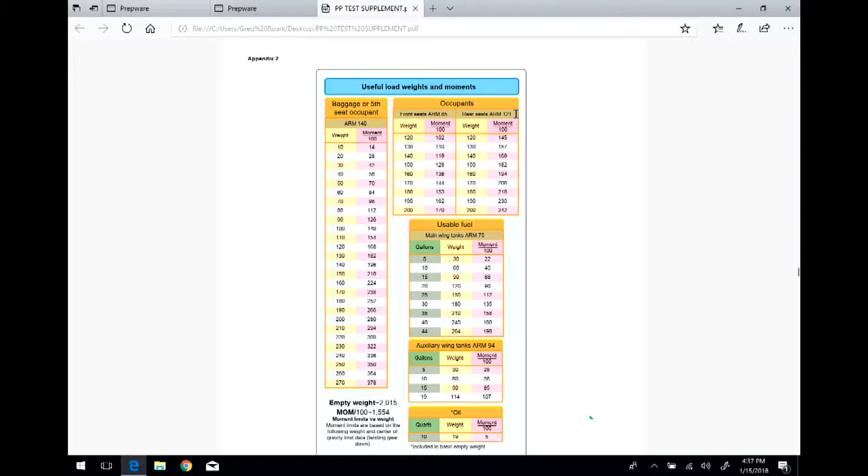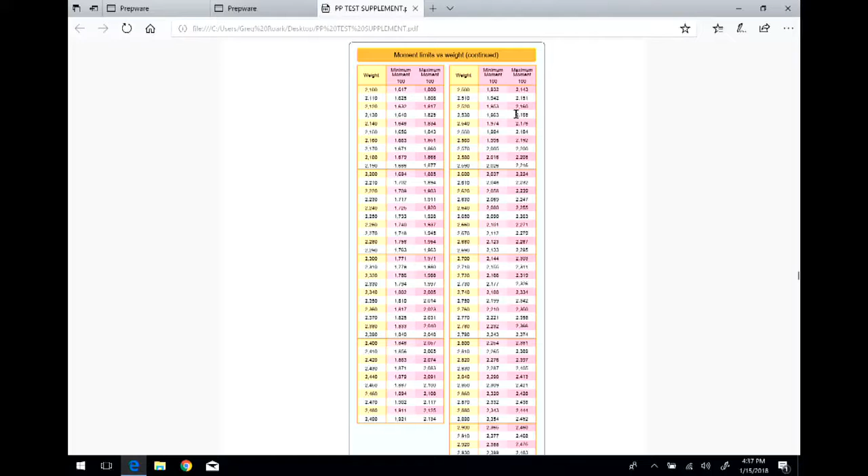Okay, so when we look here, what is our weight? Look here, guys. 2,901. All right, so we see where we are here.

See where we are here? All right, and what did we say our moment is? 2391, right? Is that within this range? Yes, that is correct. By the way, what is the CG?

82.43 is correct. Gavin, tell us how you got that. Total moment divided by total weight. What do we have to factor into the total moment? We have to multiply that moment times 100 by whatever the index is, because you want that whole big long hairy number divided by the weight.

That gives you then where your arm is, or CG. Yes, sir. So let's say you figure out that the weight is overweight by like 20 pounds or something. So then if you go onto this chart and it's 2,000...

Are you asking me that question because it shows up on another problem here that we're going to cover momentarily? Yes. Well, let's get to that one, shall we? Everybody good on this one? Okay, everybody good.

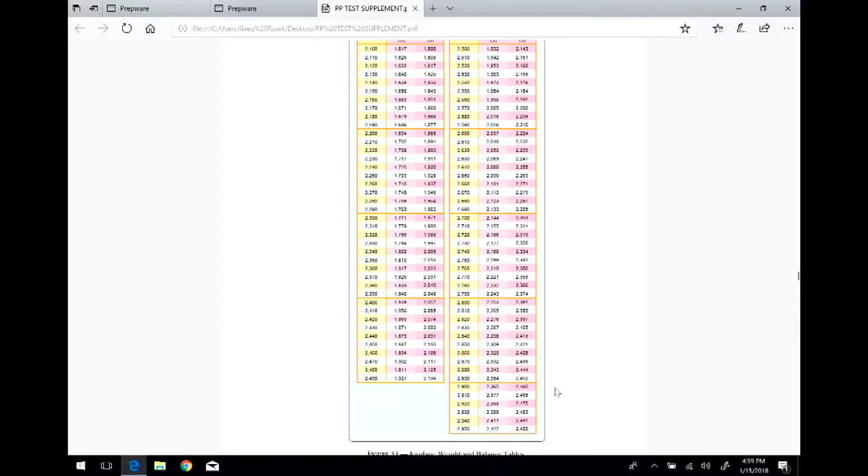Now, basics, basics, basics. Weight times arm equals moment. Another way to express that algebraic equation is total moment divided by total weight equals arm, or CG. That's how that works. So when you're asked to determine the effect of the CG, this is where you get it, right? Weight times arm equals moment.

This is what we did in class. It's no different. The only difference is you didn't have a book telling you what the answer was. You had to do it yourself. How many of you got this? How many of you got this correct? Okay. All right. Is everybody, are we good here?

Let's go to problem number 3. Problem number 3 here, refer to figure 32 and 33. Determine the airplane weight and balance. Determine the weight and balance condition of this aeroplane.

Now, I'm not going to put this one up here. So let's look at this. Again, we know on this, because it's figure 32 and 33, what is the empty weight of this aircraft? 2015. You've got that in your column, right? What do you have for the moment?

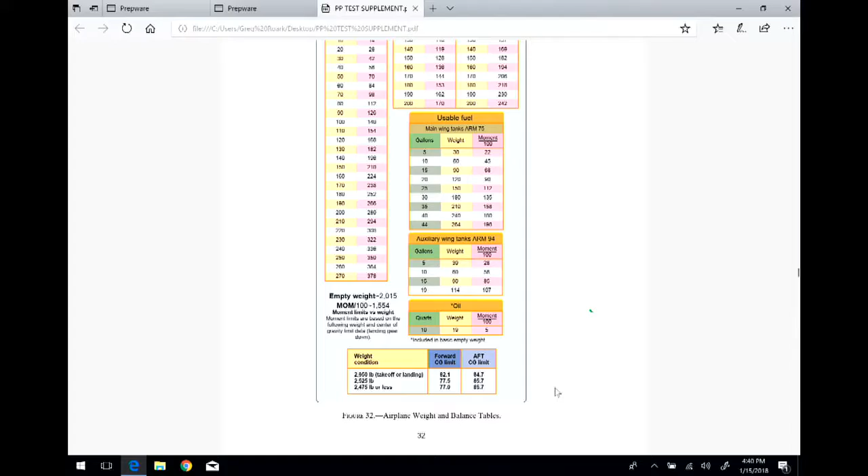1,554, because that's what it shows here on this sheet. So that's what you put on here, right? I can do this. Okay? Now, front seat is what? 280. 280 times 85. Okay?

Rear seat, 325. Fuel in the mains, 35 gallons, 210. Oops, you've got auxiliary fuel on here as well, 18 gallons, 108. Baggage. All right, what is the arm for the front seat?

85. Arm for the rear seats? Fuel, auxiliary, and baggage? All right, now let's take a look here at our moment.

We know that the moment of the empty weight of the aircraft is 1,554 because the darn thing tells us that. So what is the moment for the front? 238. What is the moment for the rear? 393.25, right? Okay?

Where did you know the 393? What was that? What is it? Sorry, I 325 times 121 is 393.25. Hold on, we're not there yet.

Okay, now, fuel on the mains. 210 times 75 is 157.5. Fuel for the aux, 18 gallons weighs 108. 108 times 94 equals? Okay, 101.52.

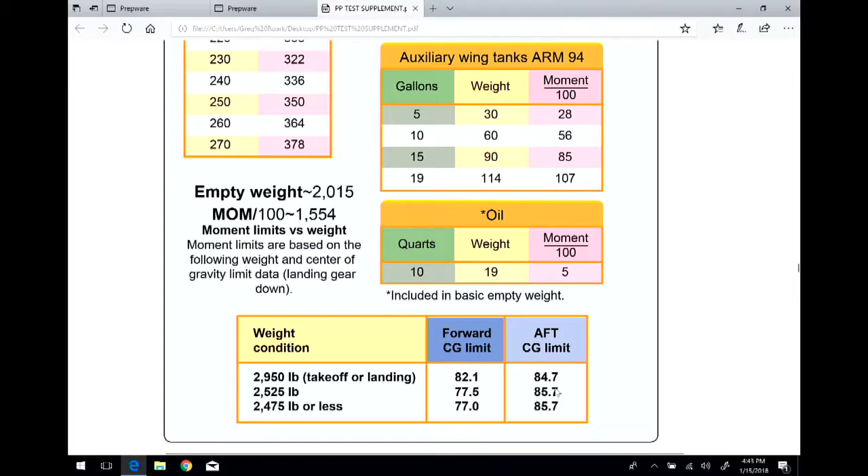What does that tell us? Overweight by what? 30 pounds. Max weight on this aircraft is 2950. Says right there under weight condition. Okay? So we're 30 pounds over.

Now let's take a look at our moment. Where's our moment? Let's take a look here. If we know that we're right down here, and we say at 2950, the max moment on this should be 2,499, right? See this?

So with this, it shows that if we look at that weight range of 2950, that we're over. However, let's think about this: would the CG be out of range for an aircraft 30 pounds overweight? How would we know that? We have to figure what?

The CG. What's our CG for this problem? 83.99. Look up here. Well, come on, look up here. Yeah, I got the CG was in range because of that. So if you look here, the actual CG is kind of within range even though you're 30 pounds overweight.

Now, what was the second question? Second part of this question. Would you fly it? I said no, but the CG is in range, I said no, the weight and the moment are out, but the CG is within. Okay, no, with an exclamation point. Okay.

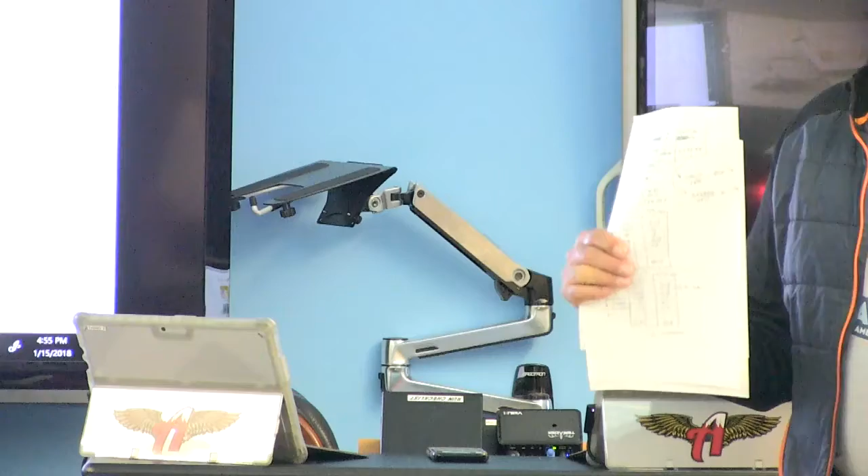Do you guys understand how I did this? Now, another way you can do it — if you don't understand how to do the actual net replacement of your moment — is to do two tables. Here's what it is when it landed, here's what it is when I take off. What's the difference?

After all of that, did you get your CG went from 84 inches to 81 inches? 81.01, that is correct. So what happens is your CG moves forward how many inches? I said 3 inches. That's exactly what happens.

Okay? Guys, how we doing? Okay? Yes.

These aren't — these I made up. It's just going to be the ones in the book. That's what they're going to be. But guys, here's the deal.

You can't memorize them. I mean, you're going to memorize them for the test tomorrow, but you've got to know how to solve the problems. Do you know why? Because when you're out there taking your check ride, your DPE is going to make sure that you know how to do it. And I am darn sure going to make sure that you know how to do it in the oral test prep thing, because we're talking about your life here. So you're going to know how to do these.

This would be a good time to learn. You with me? Let's do the next one. Real quick, the next one's not going to take too long.

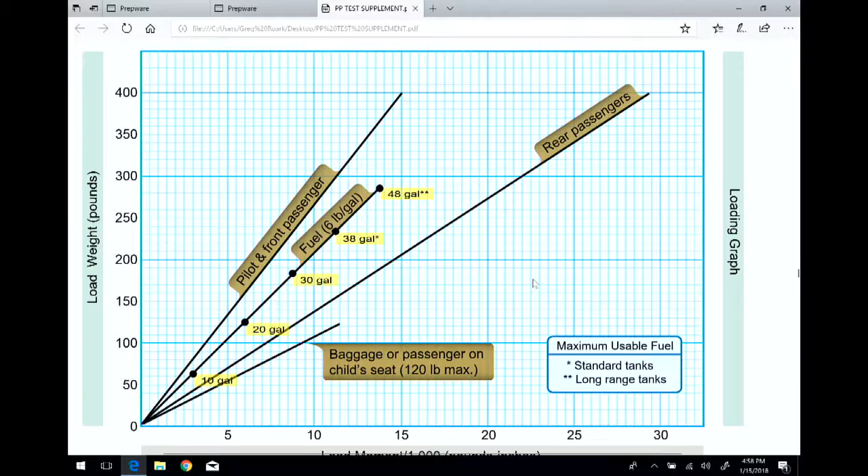1350, what's the moment? 51.5. What is your moment index on this particular figure? Divided by 1,000. Don't get confused, it's divided by 1,000, okay?

Front seat, what do we got? 375. Rear, what do we got? Fuel, what do we got? 216. How do we get that? That is correct, 36 times 6. Oil, what do we got? How many? 15 pounds. 15 pounds of oil. Remember, we got to account for the oil, right?

Okay, all right. Now it gives us the moment of the airplane, 51.5. It gives us the moment of 8 quarts of oil, right? So we have to calculate what? We have to calculate the moment for everything else. And how do we do it? You draw your lines. This is where we draw lines. This, my children, is where I draw the line.

All right, so now on the front seat, 375. Let's take a look. Here's 350, 360, 370, 380, 390 - I didn't put those on there very well. 375 is going to be where? Okay, 375 is going to be between this and this. It's going to be about right there, right?

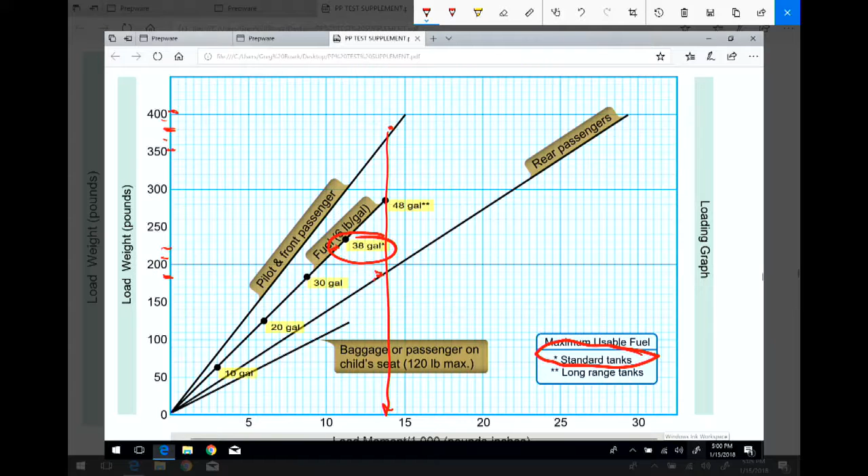99.8. What is the CG? For your figure, that would be correct. What'd you get? How'd you get it? Total moment divided by, okay, all right. For mine, I got 43.906731.

Last one, number 7. What is the maximum amount of fuel that may be aboard the airplane on takeoff if loaded as follows? What did you get? Story, say what you just said. How much is that? 48 gallons. How much does that weigh? 288 pounds.

Here's why this is a little bit of a trick question, and why I have the two asterisks below - did anybody catch why? Drawing attention to the fact that on this particular aircraft an option was the long-range tanks, and the long-range tanks give you 48 gallons. Now, how many of you actually did the math to see, does that actually work? Did it? Yes, it does. It actually does work. So when you do that - that was the one I was kind of guessing on - your weight, because the max you can put on there is 288 pounds with the long-range tanks, that's it, 48 gallons.

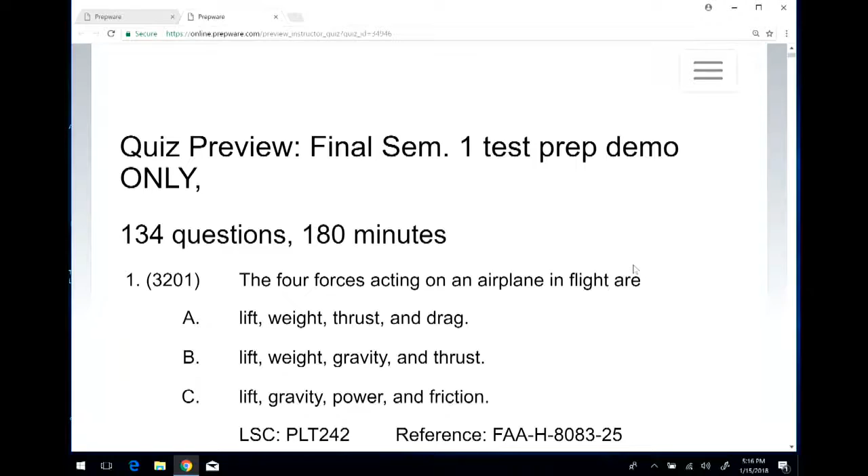Wait, are the questions going to be in the same order? Drag, A, alpha. Alpha A, lift, weight, thrust, drag. Never mind, I figured out the answer, but I was wondering if the questions are in the same order for everybody. Yes, it's going to be alpha. That is correct: lift, weight, thrust, drag.

Click on it, make it go green. It doesn't go green because isn't it a practice quiz? I'm just previewing it here, guys. This is what we're doing.

Oh, alpha. Oh wait, alpha again. Yeah, alpha, I just did that question. There we go. Now, my God in heaven. This is so... oh, there's napkins, yeah. Okay, random. Now here's the thing.

This is an example of the most correct answer. Is it the correct answer? Why would it be false? Because wouldn't they technically be in equilibrium when you're on the ground and not moving? No, because there's no work. During straight and level, unaccelerated flight, that is the correct answer. What you're choosing is the most correct answer.

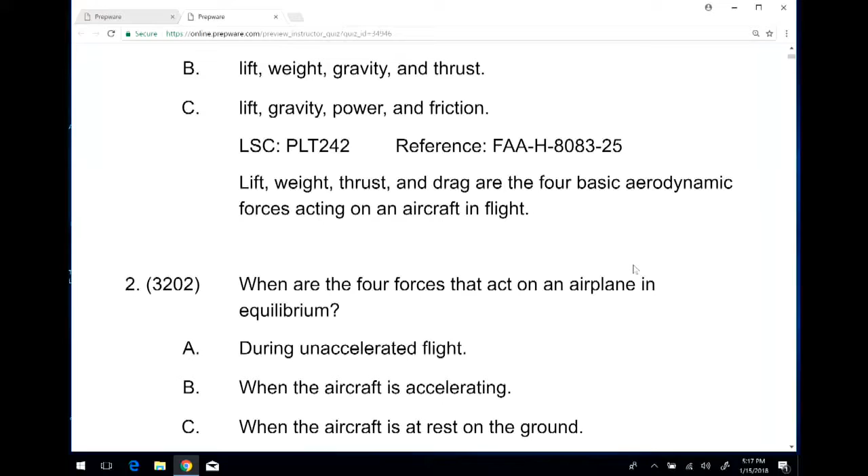What does the FAA tell you to do? Choose the most correct answer. Okay, so in this case, it is the least suckful of the ones that you have. Okay? So there we go. All right, next.

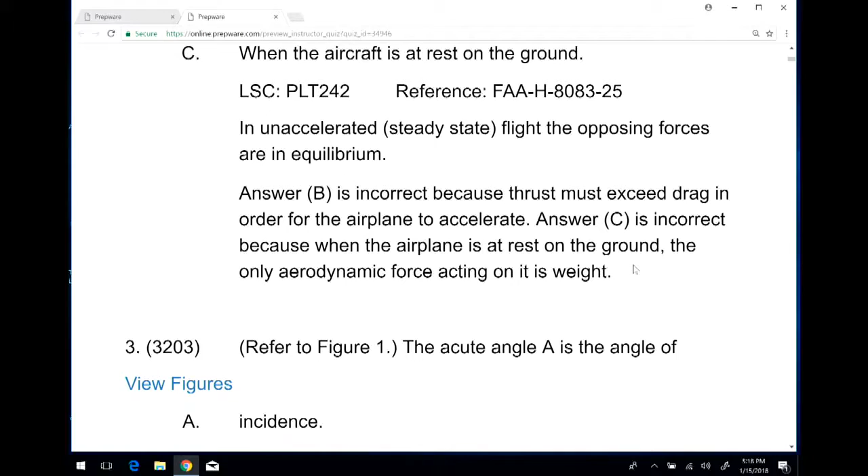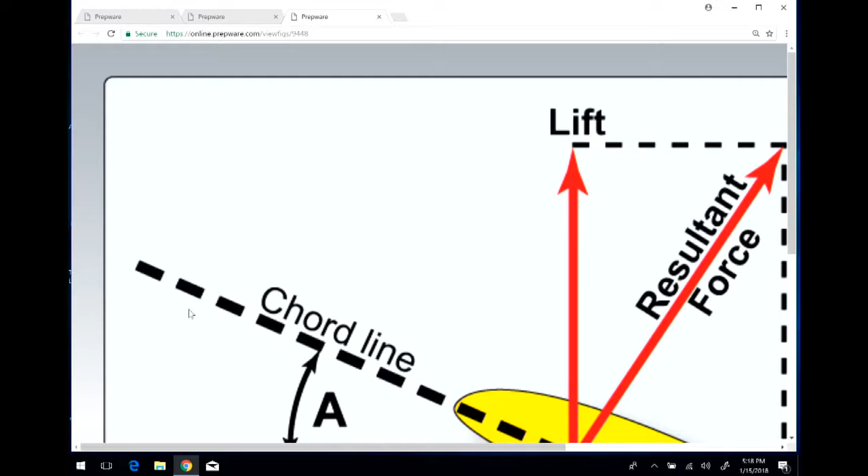Refer to figure 1. Banana. I can see this figure in my head right now. Alpha, are you kidding me? Wait, I didn't even see this. It's the angle of attack. Angle A, yes, angle alpha. Acute angle A is the angle of attack.

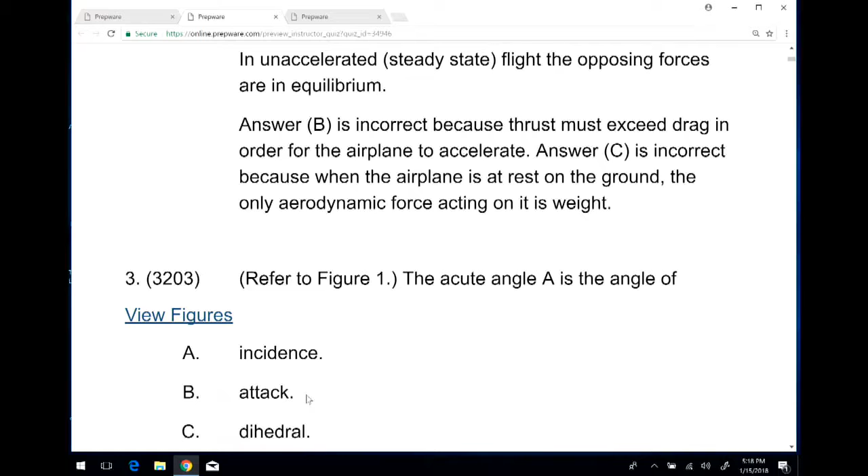So the correct answer is Bravo. Wait, I have a question about this. It doesn't really pertain to this in any way, but it could be answered very quickly. Okay, go ahead. Do all pilots use the same alpha, bravo, same letters? Because once I was flying commercially and the people...

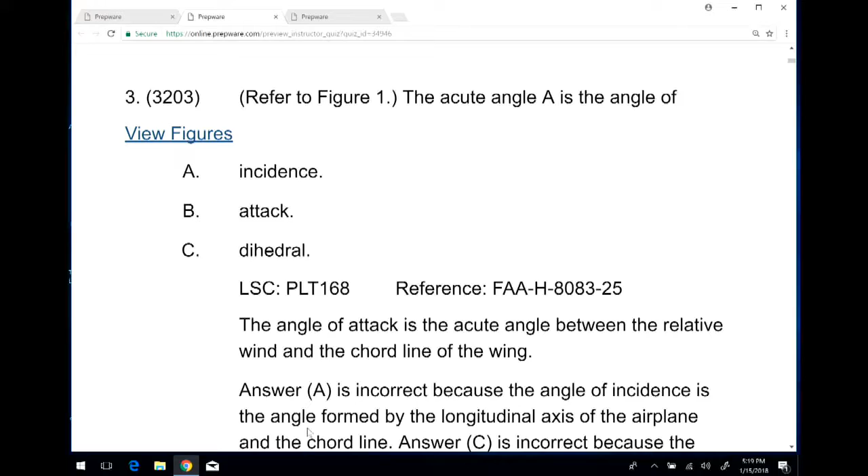It's pilot talk. Okay, all right, here we go. When we get to communications, you'll learn not just the Z, Zulu - you'll learn the pilot phonetic alphabet, and you'll also learn how we say certain numbers when we get to communications.

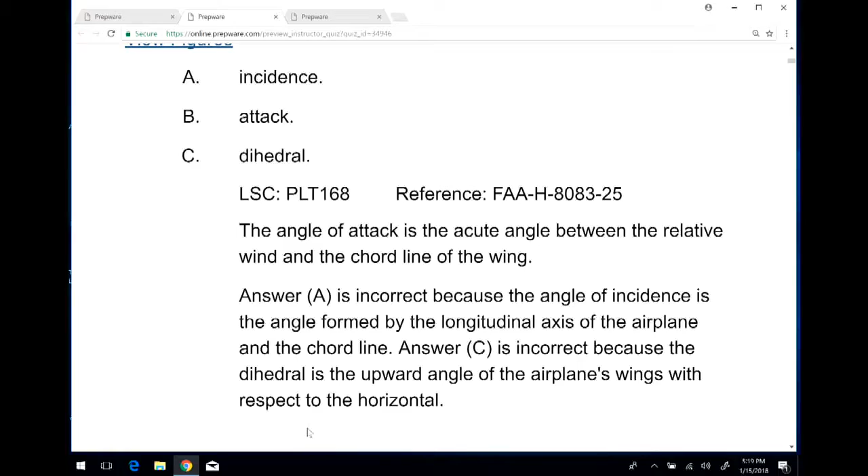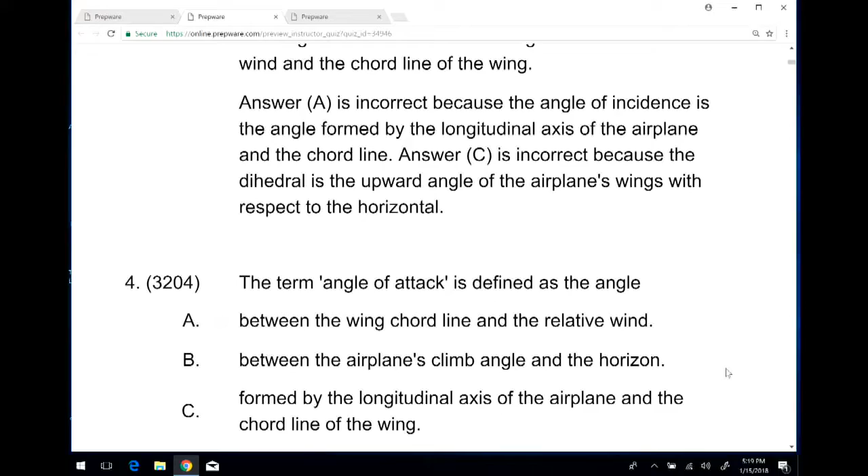All right, here we go. Alpha. Yep, alpha, not omega, just alpha. Gentlemen in the back, this is for you. What say you? You like it? I do too. Okay, that's alpha.

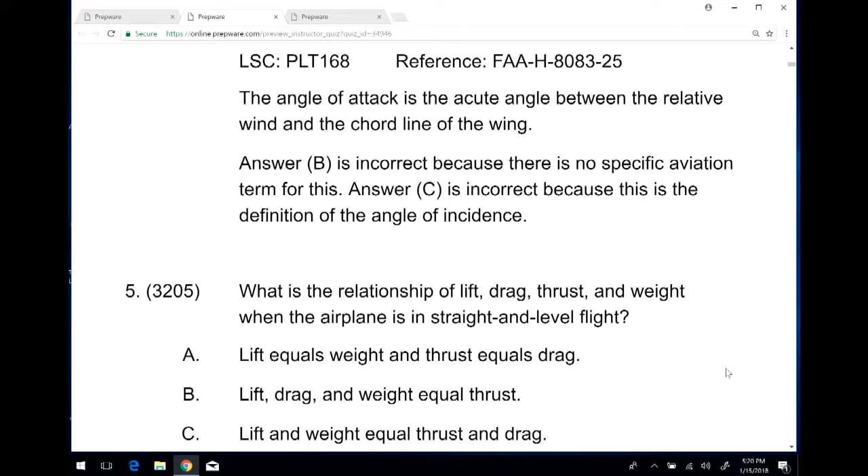Guys? Okay, do you understand why that is correct? Okay, now again, this should be in straight and level, unaccelerated flight to make this answer accurate.

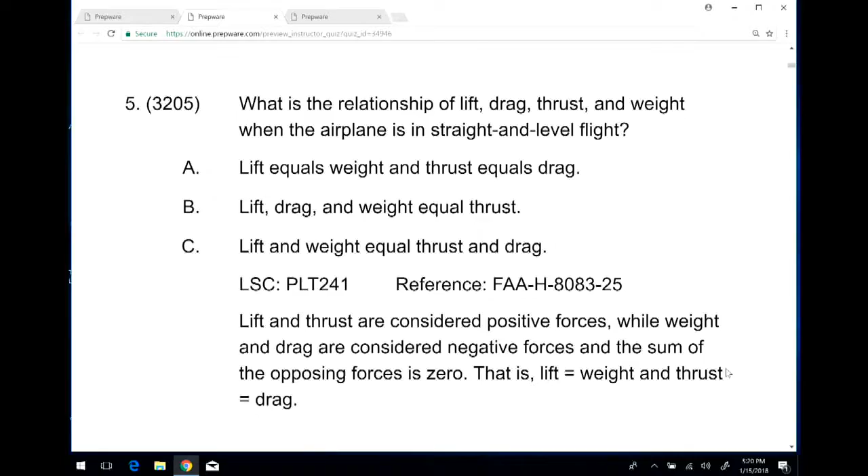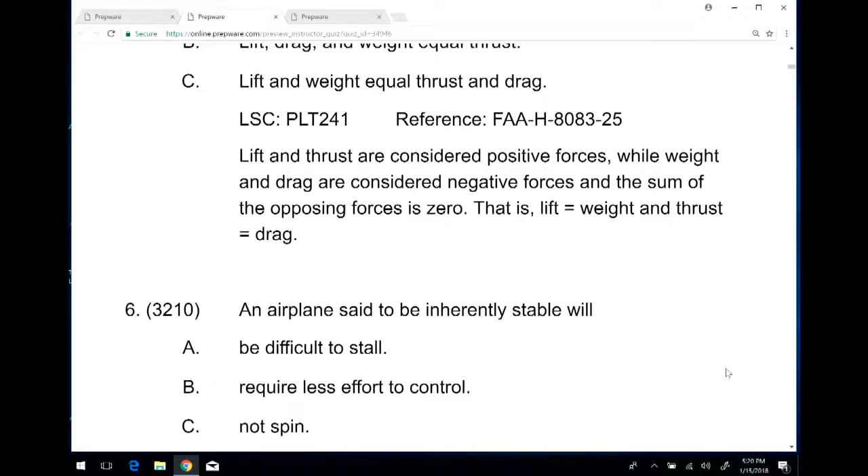Bravo, wait, let me read it. Yep, bravo, banana. Bravo, banana. Wait, yellow. Brown banana, I ate a brown banana this morning. That's just icky, that's disgusting. I put it in a smoothie, so I couldn't tell. You can tell. If you kind of put them in like muffins or something, that may be okay.

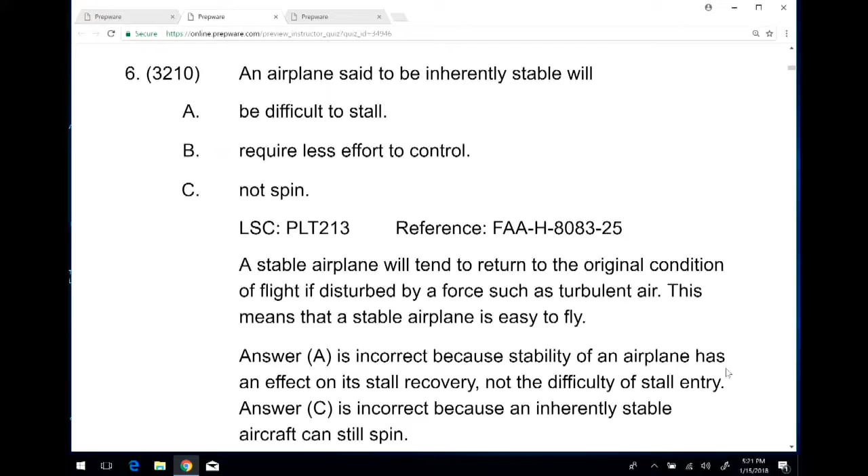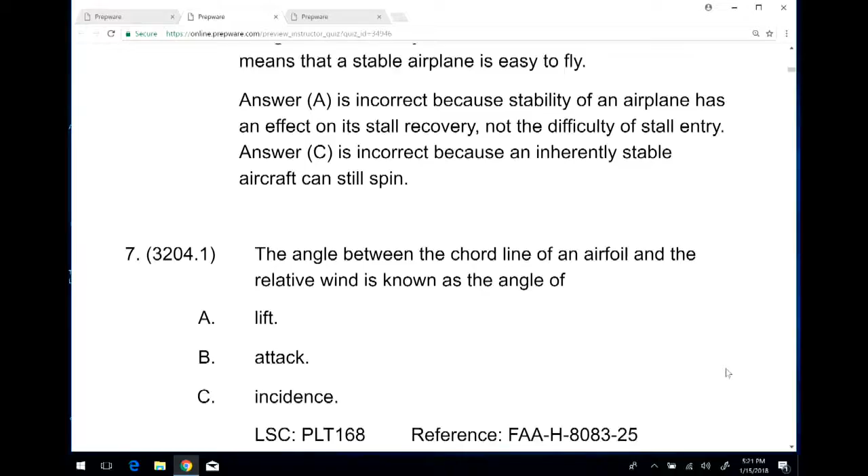Wait. Bravo, bravo. You guys aren't even reading the question, you just answered. Okay, bravo, there you go. It's the angle of attack. Well then, you guys got this? Bravo.

Yeah, you see, you memorized it. No. Yeah, it is alpha. I have that on... I know he's going to ask that, so I have it on my computer. Okay, let's do this, let's just go with what we have up here, and that way our focus will be here.

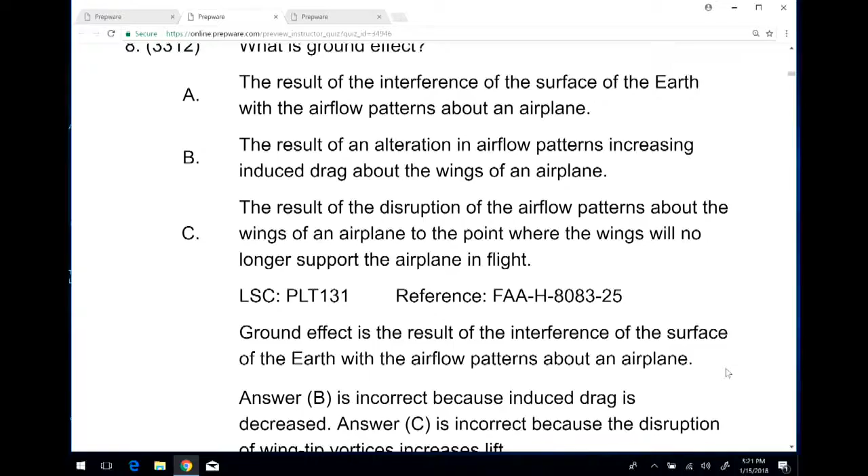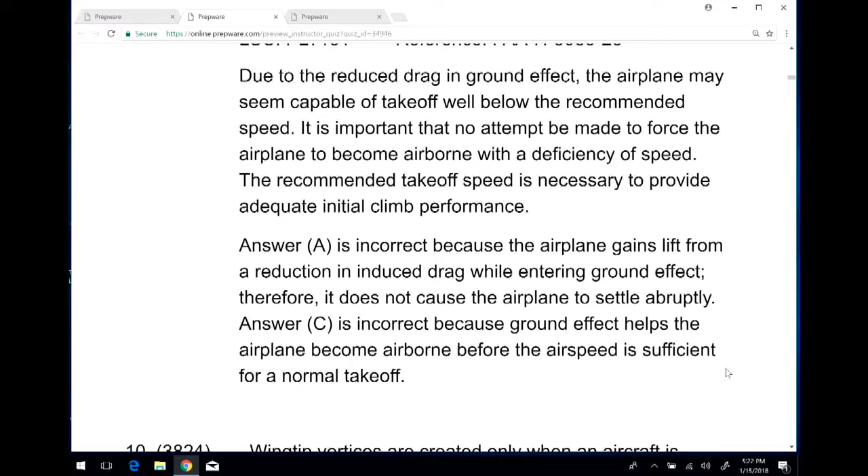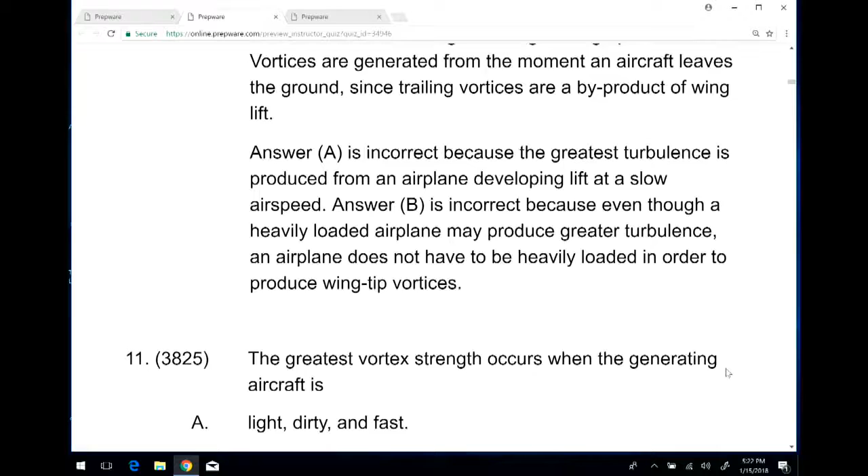C, Charlie, boom, I got it. I prefer Carly, but that's just me. Charlie, C, Charlie, oh wait, I actually don't know. Carly the Carly, Carly dates Charlie. It's gonna be like, I'm gonna see that and be like, oh yeah, Carly dates Charlie.

Okay, so when that great big airplane taking off pulls up the gear, pulls up the flaps - on departure, that's when those big airplanes create the greatest vortices. Remember the story I told you about November 2001? An Airbus flying through the vortices of a 747, ripped the vertical stabilizer off the airplane. The airplane broke up, went down, killed everyone on board and people in Queens.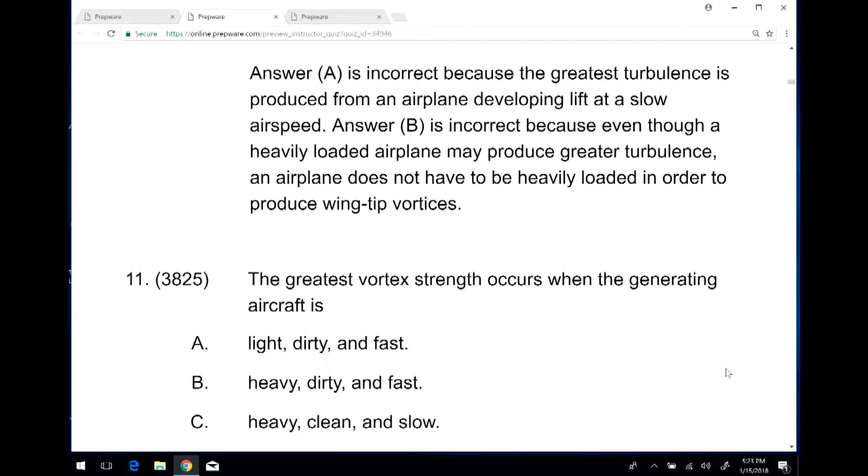Is it because when the airplane's going slow, it has the greatest effect on the air around it? Because again, let's think about it: heavy, clean, and slow. So clean, heavy, slow - you're going to have a higher pitch angle. Here again, it's the greatest. You can read this here again.

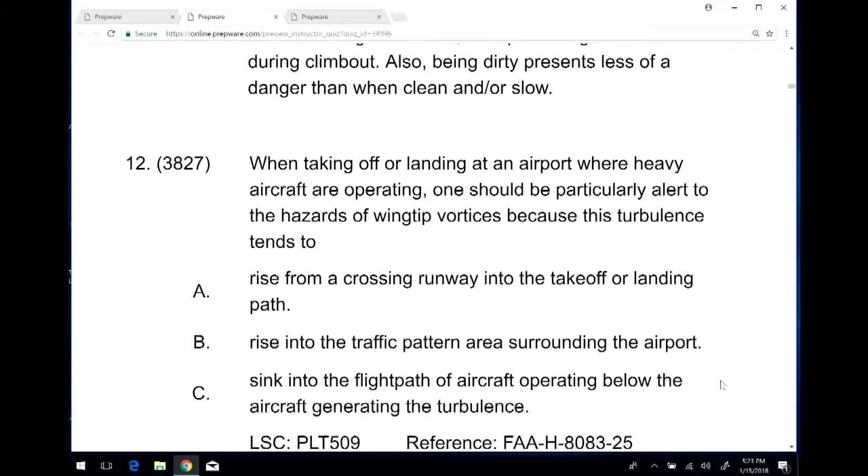You can finish it, we're going to go till 6 o'clock. If you want to go home tonight and grind through some of these questions, God bless. If we submit it, will it submit to you and we won't be able to go back through it again? Probably, I don't know. It's gonna be on the test because there's only 60. Possibly. I'm not waiting. Okay buddy, do not wait.

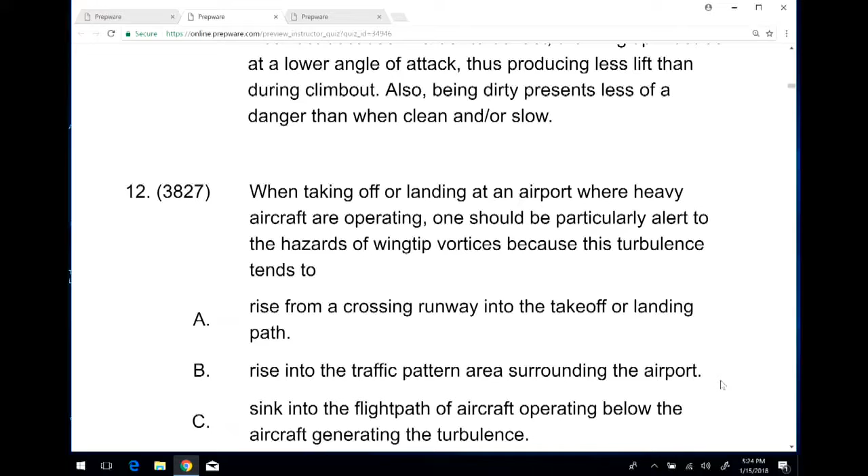All right, so here we go. What do we got? Hang on, Charlie and Carly, they're dating.

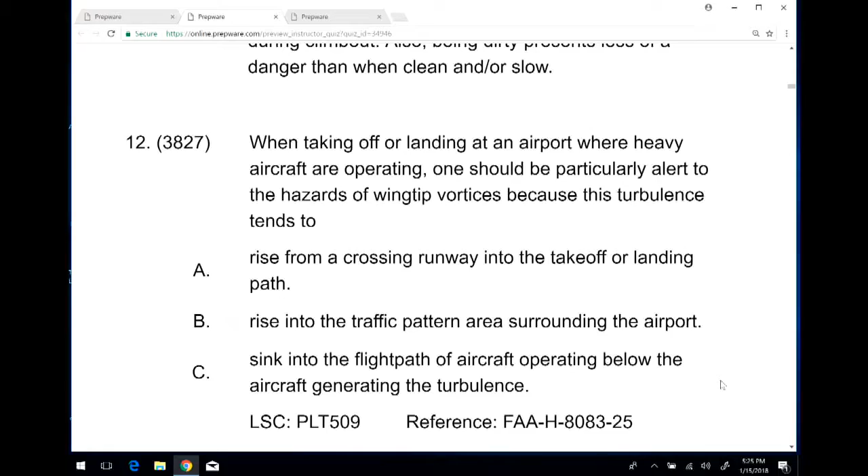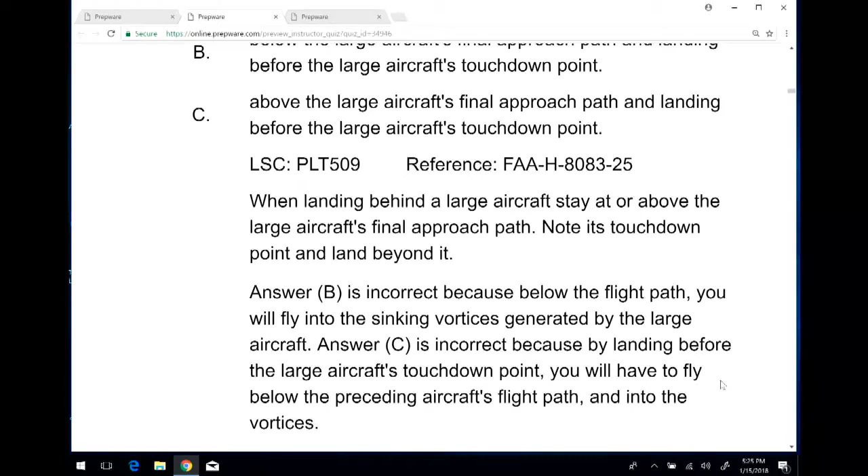Above and beyond, which is alpha. I just have to read through it because I'm a good student, Mr. R, I read the flipping question. Times 2, well done.

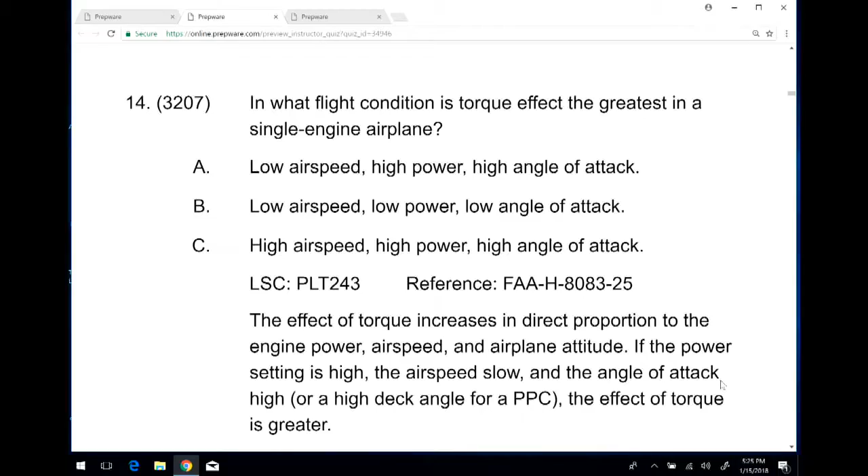Here we go, guys. Right? Oh, alpha. Sorry, I'm in, it is alpha. Just one second, please.

The least amount of torque effect is produced under these conditions: low airspeed, high power. Because if you think about it, if the propeller's spinning faster, the engine's going to want to turn harder the opposite direction. It's just wanting to turn your airplane over. It increases with power and airspeed.

Have you made the final yet? The effect of torque is greater.

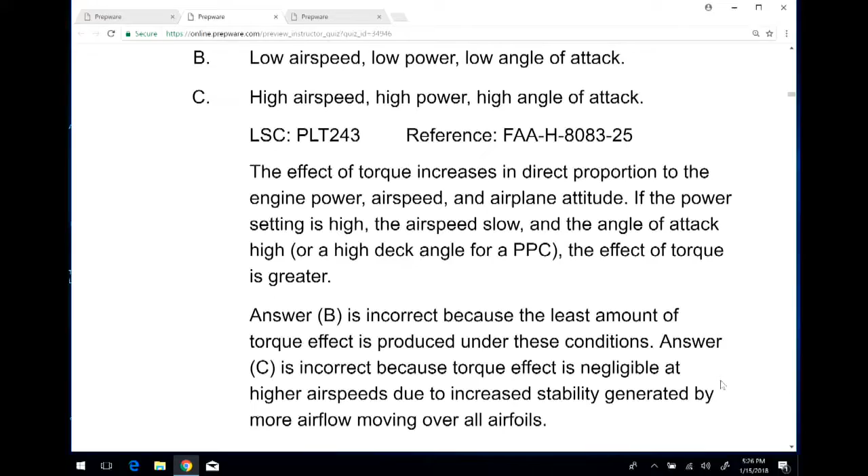I don't make it until tonight, that's when I make it, I do it the day before. We had a situation a couple of years ago that was somewhat unfortunate, where somebody logged in using my credentials and pulled a final. So, yeah. Okay?

Well, come to find out, this was the last straw for this particular person with computer stuff, because they had been doing some stuff at the high school as well. So how did they just hack into it? Not sure. So anyway, there you go.

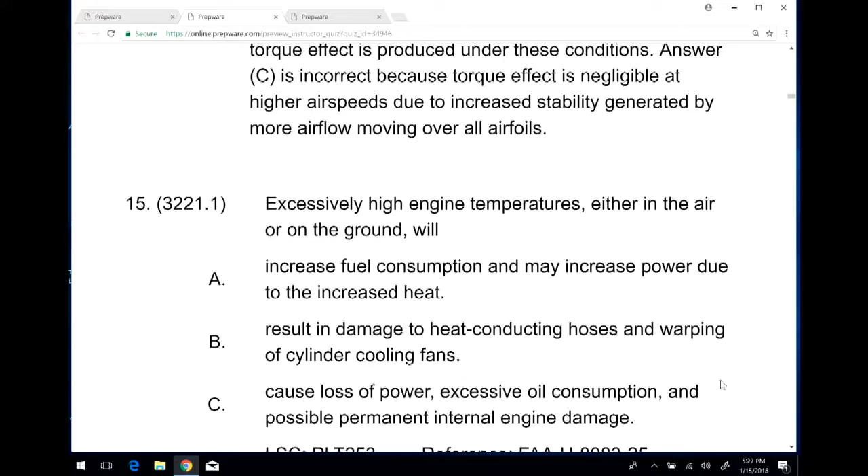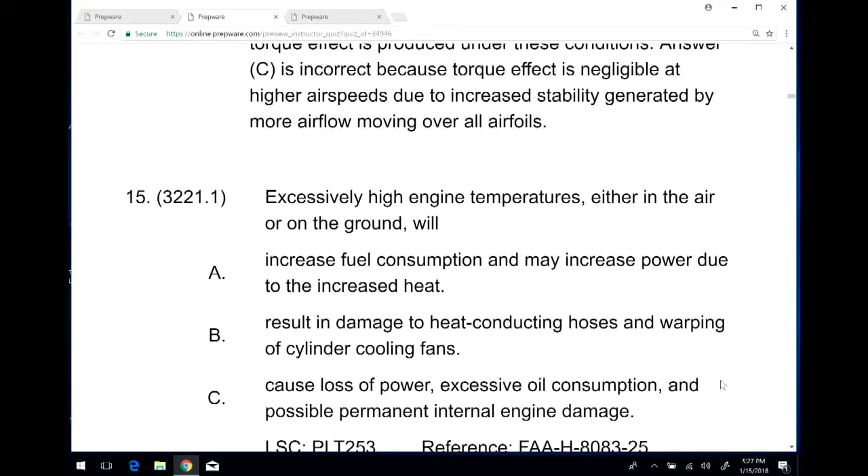Okay, what do we got? Oh, I know, wait, no wait, Charlie. Wait, you know what? I might be wrong, I might be wrong, I might be wrong. No, yeah, I'm right. Well, there is waiting in this time. It's Carly and Charlie dating, okay? Whew, I need to.

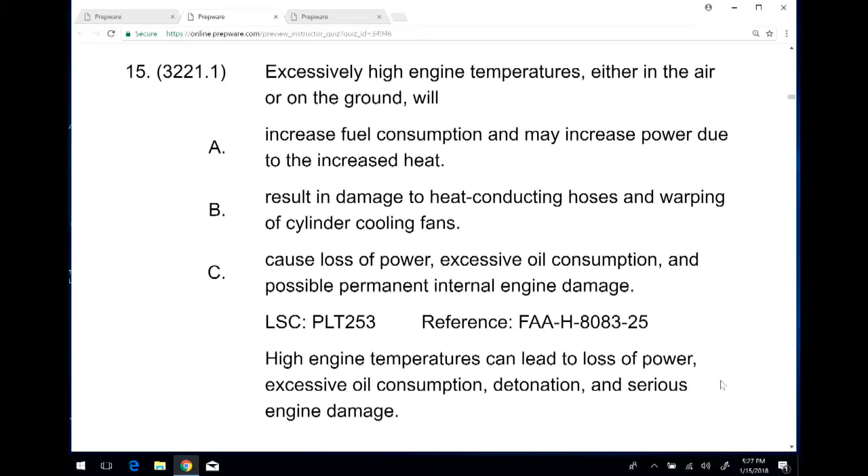Okay. Charlie is correct, Charlie is the correct answer. And Carly, well wait, can we wait until everyone's had the question and go 1, 2, 3 before we answer it, so people don't just scream out? I thought that's what I was doing, it takes me a minute to read. Just tell me when you're ready. I'm not ready. What is the end of that thing?

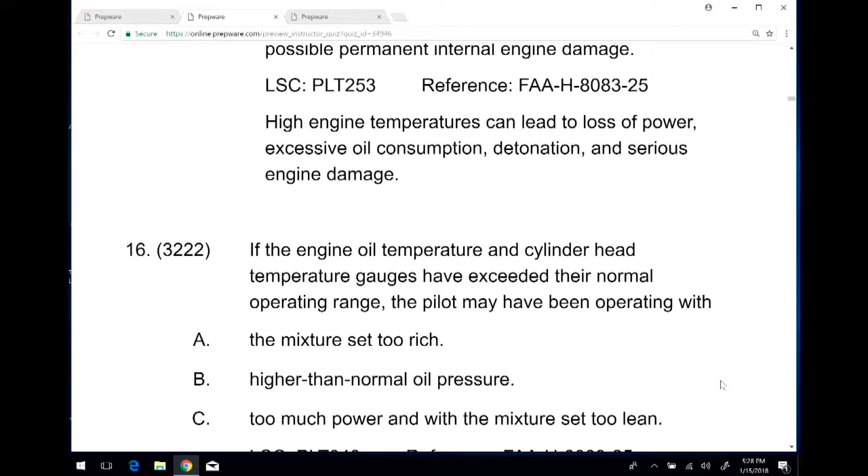Oh, ooh, I think I know this, it's the couple. I cracked myself up so hard. Your oil's hot, your cylinder heads are hot. Oh yeah, why? Because you're using too much power, you're overrunning your engines. So what is it? See, Charlie, the couple, you know. Hey, the couple, that works. Charlie and Carly are a couple. Okay, thank you, Charlie. Does that make sense?

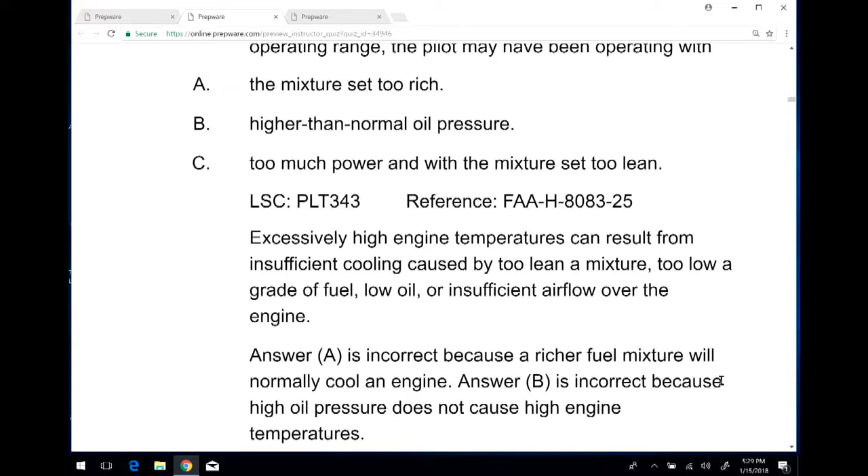Okay. Remember, adding fuel cools the engine, but it'll also diminish the performance of the airplane depending on altitude. So in this case, full power, trying to climb out too fast on a hot summer day, and then leaning too aggressively, stuff will get really hot.

Let's let people read. I don't understand, but I know that the answer is Charlie. Why? No, because I know it. I've seen it so many times.

So remember, you can't sever the circuit if the ground wire is broken. If the ground wire is broken, you're still going to have your key still work. So in order to close that circuit, the ground wire has to be connected. Oh, so the energy can go through the circuit. Oh, so I was always thinking you wouldn't be able to turn it on because the circuit wouldn't be working.

The worst part about this, and the reason you check it, is because not only can you not turn it off if that ground wire is broken, but what's the worst part? You might not notice it's a problem. Let's say you're out there checking the propeller, but instead of checking it in place, you turn the propeller. What could happen? It could start. Yeah, it could start. So check this first. This is why we always check these on engine shutdown. In the Diamond, this is part of your checklist. That'd be horrible.

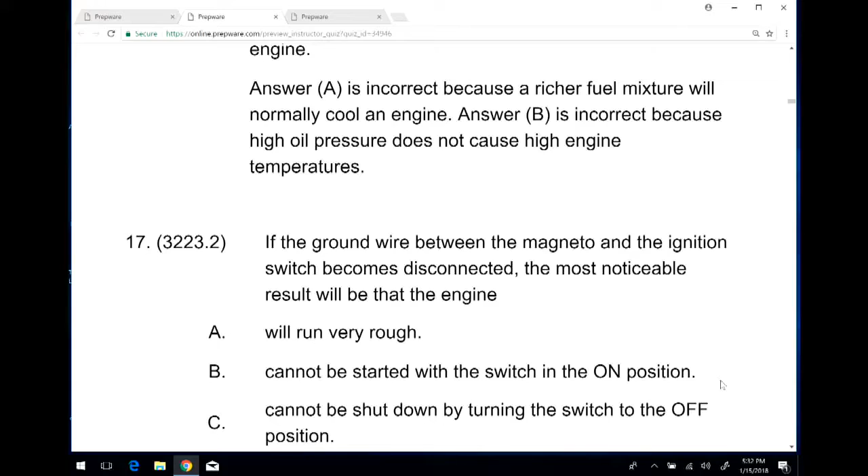Gavin asked, is the ground wire in key hard to fix? No, it's not. In fact, some people will actually put in a beefier ground wire. Here's an example - we have a ground wire to the alternator in the Diamonds, and that little sucker is like a human hair. You still get a little vibration in there, and over time, when the mechanic tightens it down like normal, it just separates. Then you have a problem. So what they do is replace those with a heavier gauge ground wire so it doesn't tend to break.

Here we go. No one's here. I think I can't hear you.

RTFQ times 2. Formulate the answer in your head. Allow yourself to read all 3 answers, all 3 possible answers. Go with your gut. What you got?

You guys got this? Okay. Guys got it? No one say anything. Okay, so...

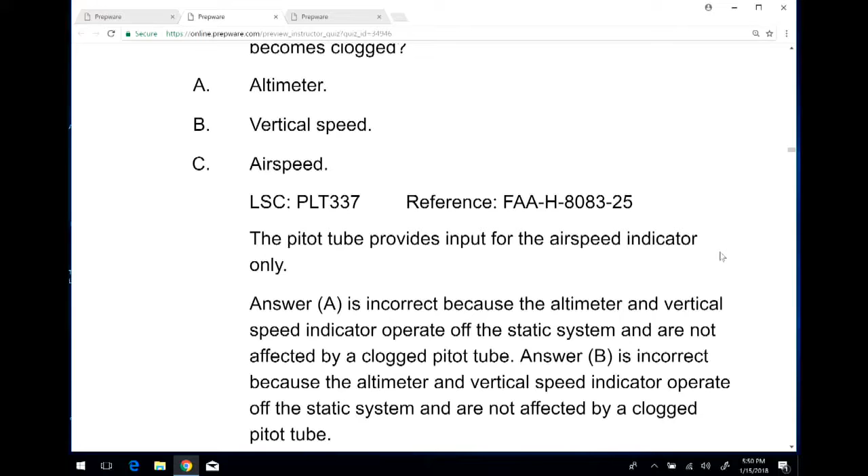Cheers, matey. I have no trouble spotting Diego back there. He is just, he's there. Everybody understand? Girl, stay with us. Here we go. Okay. Okay. Oh, I was saying answer A is correct. I was like, what? Yeah, exactly. No, I'm correct.

And what happens is, again, the least suckful answer, because the problem is going to be that you're still going to get an indication on your airspeed indicator. It's just not going to be right. But you're gonna cross check and it's gonna be fine. Thank you.

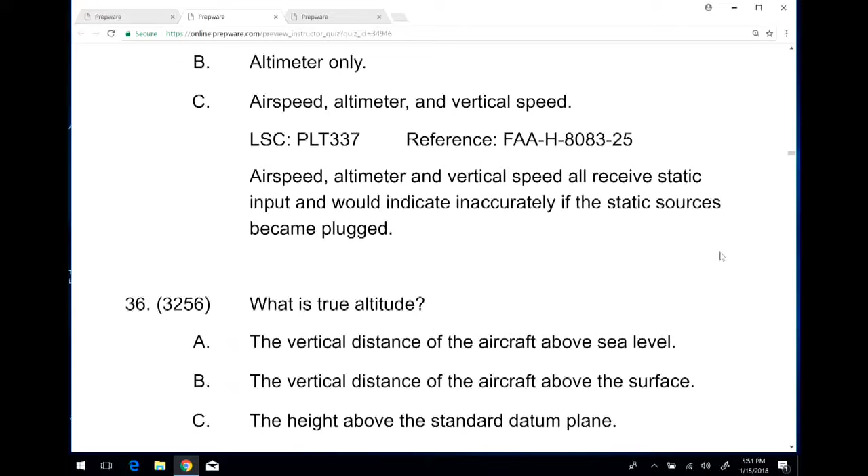Oh yep, we gotta learn these. I got this. I can do this. There we have this one. This one we are, well, okay. Okay, we good? Hang on, wait. Hold on, no. Oh shucks, yeah, yeah, darn it, I thought you were a good person.

Bugger, banana. True is MSL. True is MSL. AGL is above ground level, above the surface.

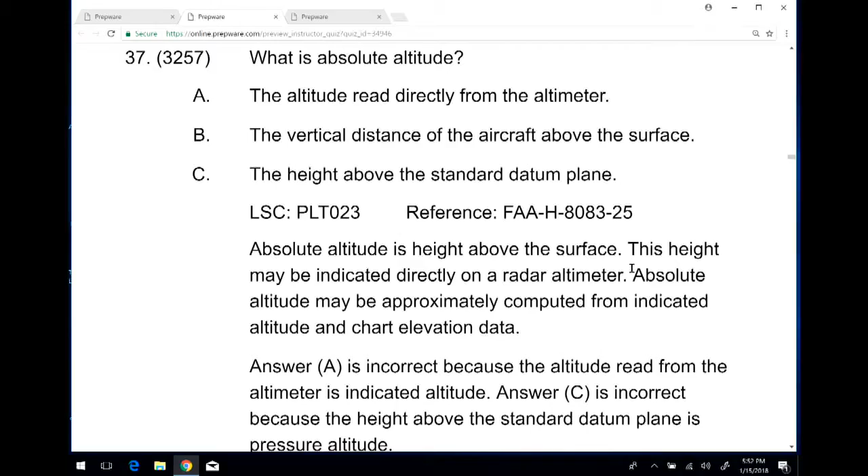I got this one. Whoa, you whack job. Okay. 8 minutes, come on let's get it. Remember the definition. Just for the record, A and C is an incorrect answer. Okay, no Diego, I was just messing with you. Diego was kind of holding his paper like this, and he was trying to decide. Are you kidding? You said that, I was like...

All right, we know, what is it? Density altitude is pressure altitude corrected for non-standard temperature. Density altitude is the one that we as pilots are most concerned with, because that's what the airplane thinks it is out there. That's the altitude the airplane thinks it is. Doesn't matter what we think.

Wait, I can do this. I believe in myself. 7 minutes. Time for ticking. 3, 2, 1. Hiya!

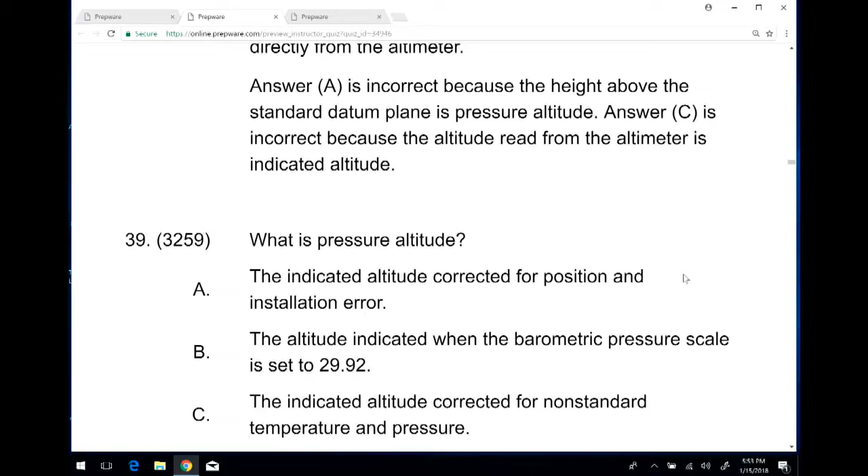Answer A is incorrect. Answer C is incorrect, so I was correct. It is not correct.

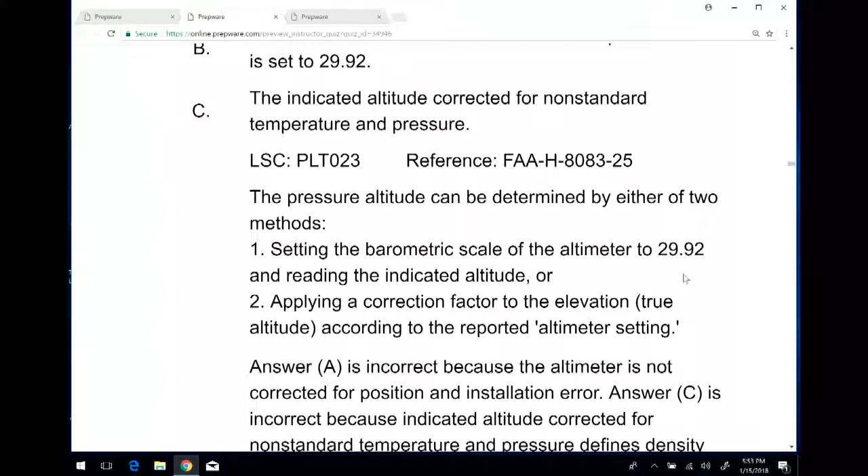Think about this. You set the altimeter to 29.92 - that's the bar, that is standard. If it is less or greater than standard, you're going to show on your altimeter a higher or lower altitude. So you can factor that difference in with your non-standard temperature to come up with the answer.

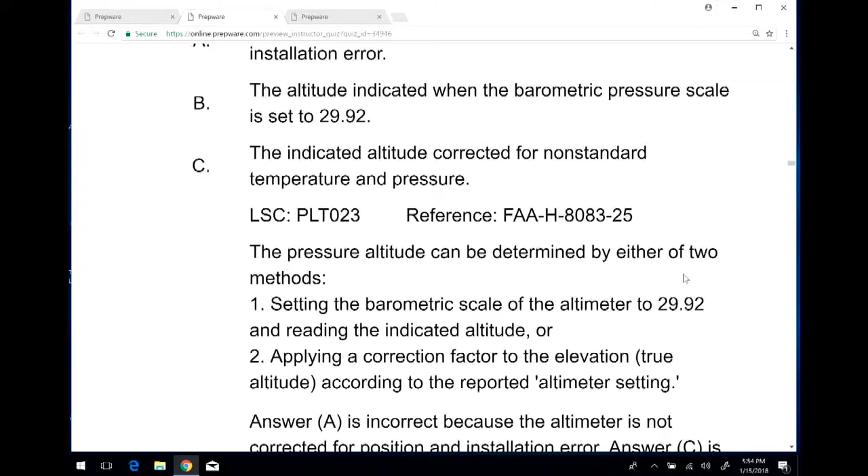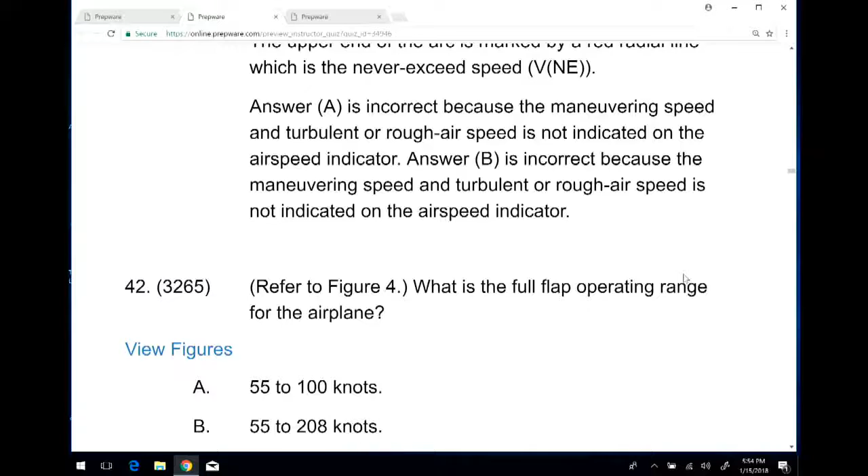Just go ahead and say C. Okay, all right, what is this? Okay, what is it? V. Thank you. No, stop reading aloud. Guys ready? Are you ready? I'm going to go ahead and say alpha. That's a good guess, thank you. That is a correct guess.

That is one big indicator. Why is that? Why, how is that? My goodness gracious. Hang on, well crap, hold on. All right, see what you got there? We're leaving in 5 minutes. It's up to you, we're here till 6, guys.

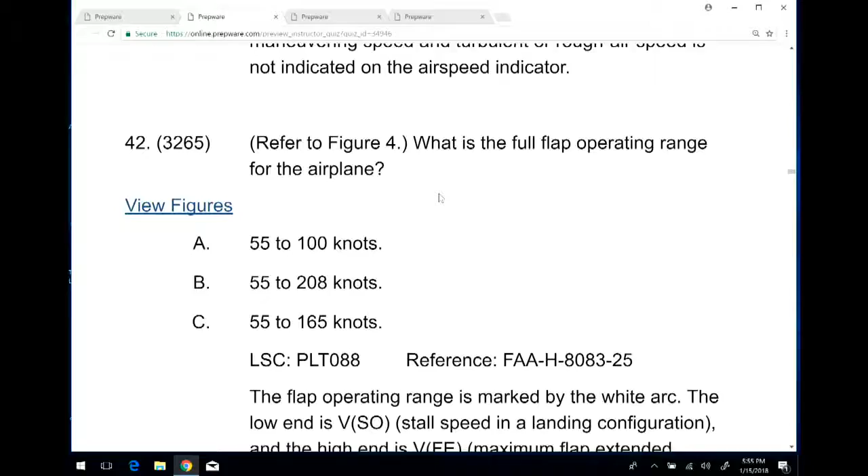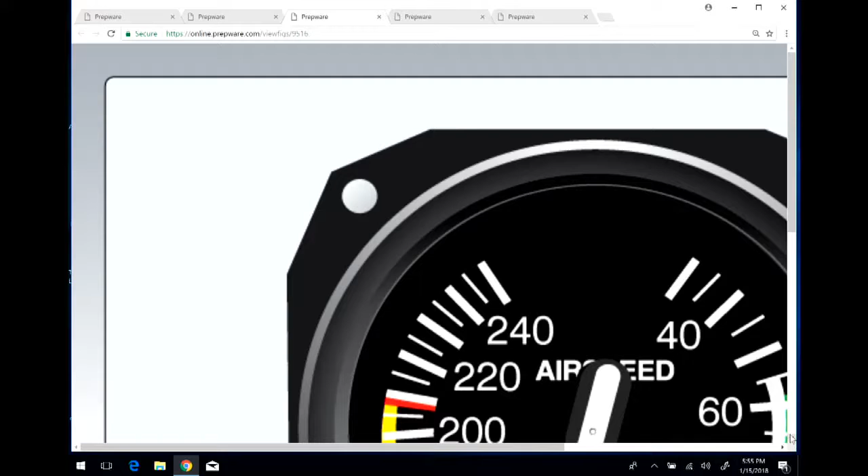Wait, did we just skip one? Oh. Yeah, up to 208. Charlie, what are you doing? Got it? Everybody good?

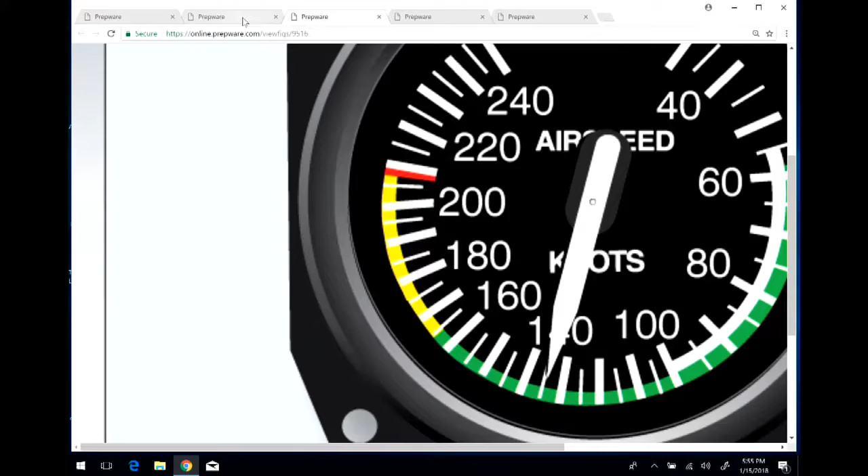This is what we call the guard channel, or the emergency channel, 121.5. The reason that it's important is that even if you're up there with an instructor, say your instructor has a heart attack, okay, and if you're not talking to somebody who is already on that radio right then and there, you need to get a hold of somebody. It's 121.5. In most cases, with flight following or on an instrument flight plan, you won't need this, only because of the fact that you're already talking to somebody and they can help you. But if for whatever reason you have to call up somebody for that, it is 121.5.

And the other thing that you do is on cross-country flights over sparsely populated areas, like through the desert - for instance, when we were doing cross-countries in New Mexico, one of the things that we would do is monitor 121.5 as we were flying along, just in case somebody was sending a signal. The reason we did that is because help is a long way away out there sometimes. So we just kind of monitored 121.5. Just throwing that out there.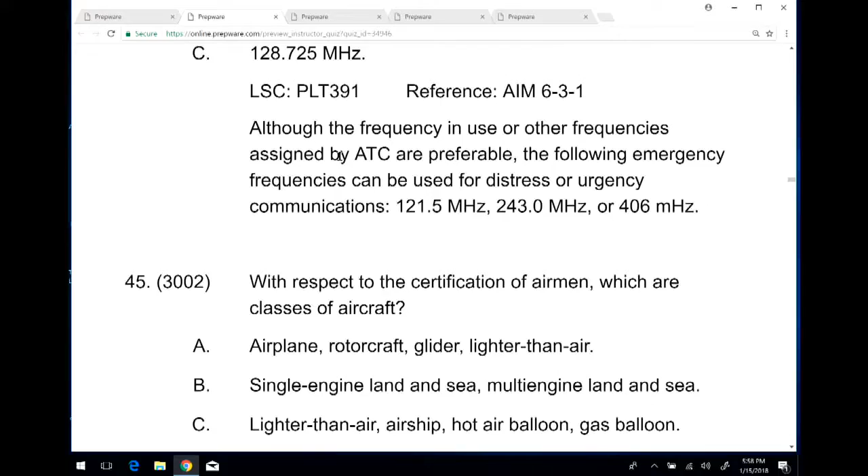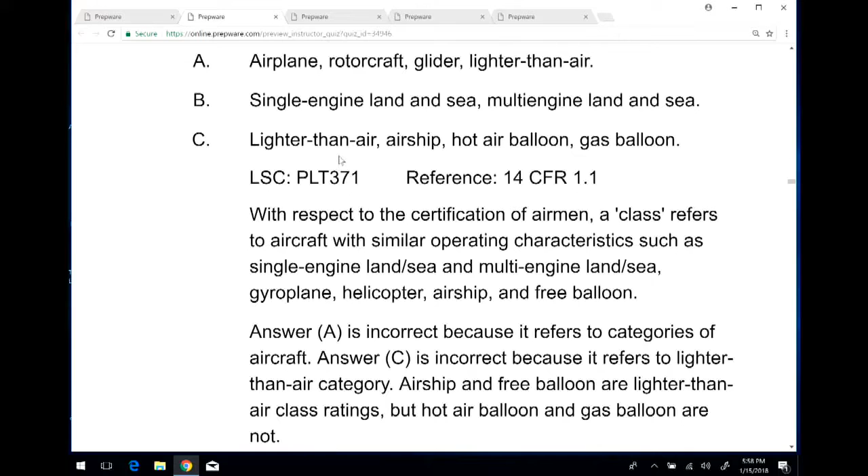Okay, so think about this - you get certified to fly what? Your airplane single-engine land, airplane multi-engine land, airplane single-engine sea, airplane multi-engine sea. So with these, if you look right there, those are classes of aircraft.

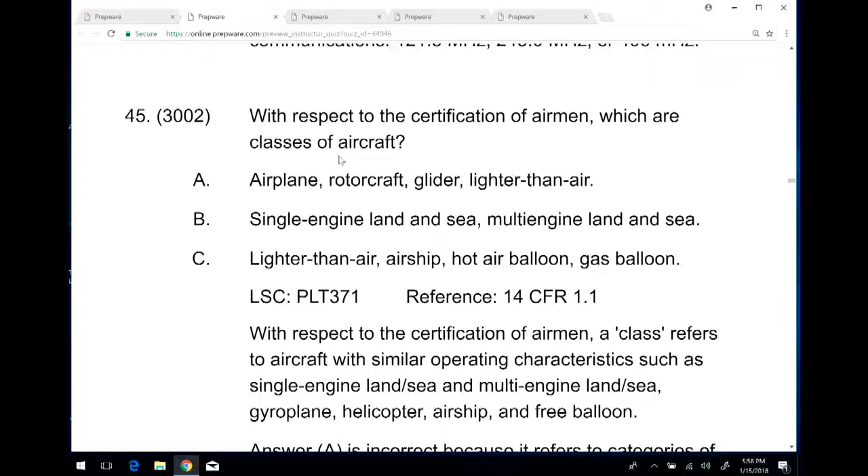Well, now that we've had this difficulty, I'm certain that that will be on the final, so better nail that down. Now then, with respect to certification of aircraft, which is a category of aircraft.

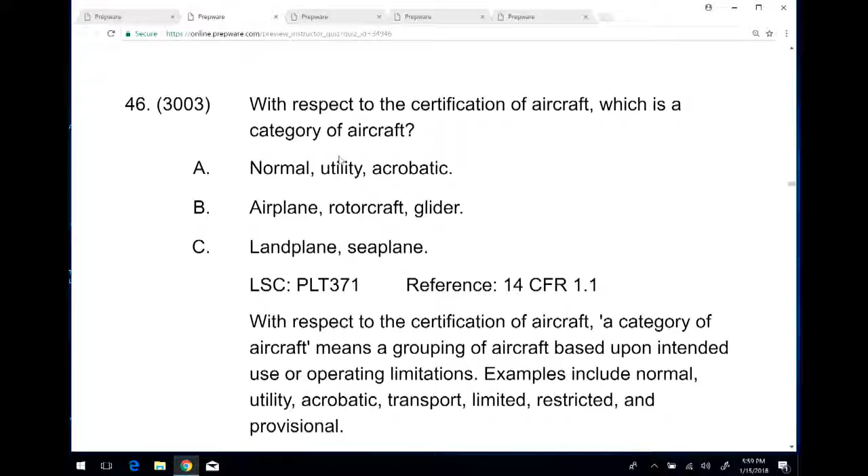I have A, I have A, I have B, I have B, I have B, I have A - or is that a 1? Is that an A or is that a 1? Oh, category, hang on, category. There we go, A's here. A has arrived. See, you know what, I knew that one. Okay, I did, boom.

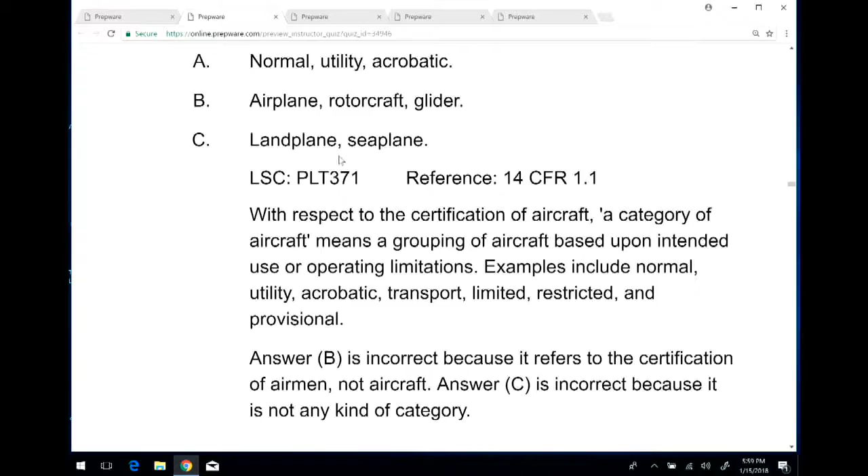It's like, what is that? You know, again, flashcards. Wait, do people who watch this take the final too online or no? Do what, just watch it? They're watching, they're just watching to see kind of what we do, seeing how nutty we are. Wait, do we have any people? I need more, are there any like strangers watching?

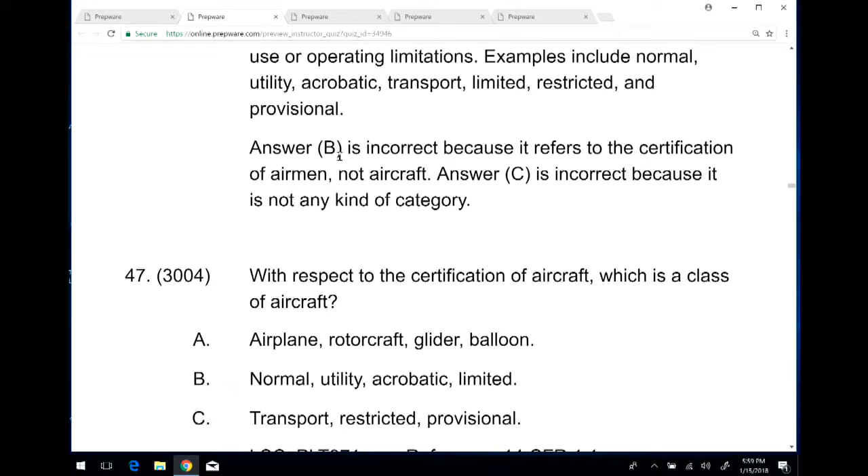We have 1 minute, guys, 1 minute. With respect to certification of aircraft, which is a class of aircraft. It's not a raise your hand - oh wait, for you it is. Hang on. Okay, the A has returned, because B and C are incorrect.

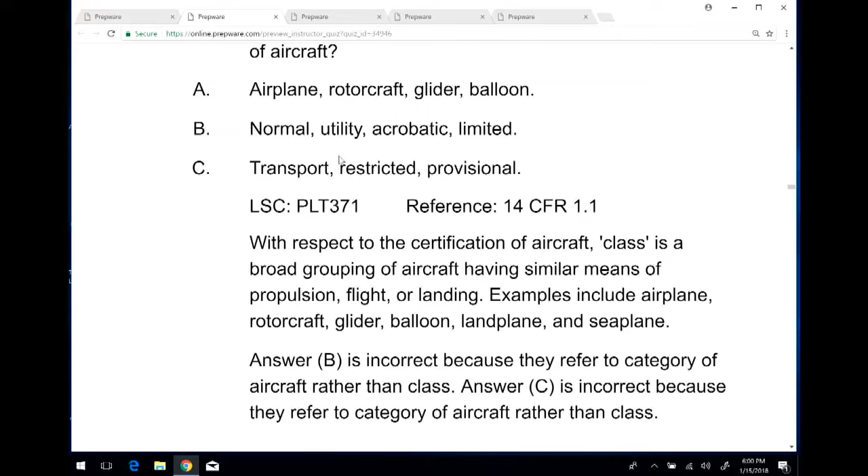Okay. Oh, well no, oh I know this one, this one is right in my head. Last one, this is our last one.

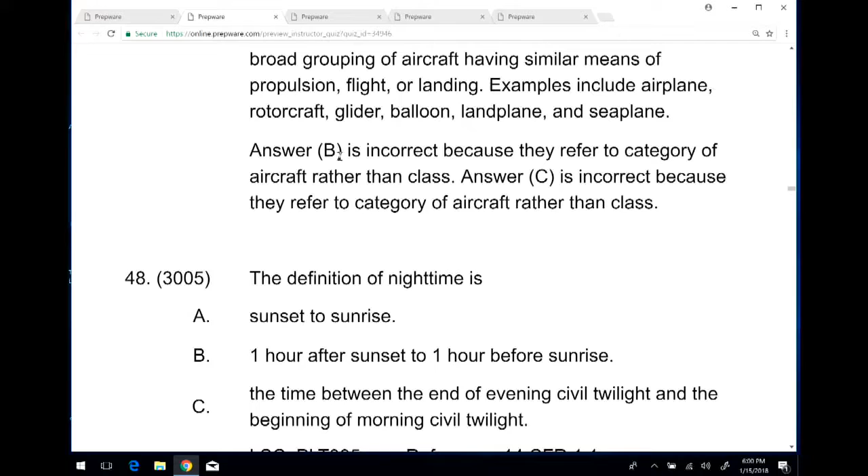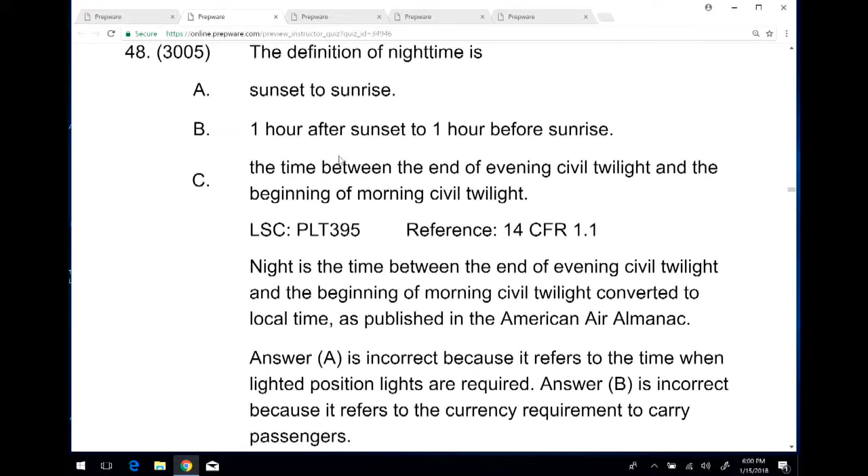Wait, technically all of these we've seen, so they can't be on the test. Remember, this is correct - this is the nighttime definition, but it is not necessarily the definition with regard to when you can have passengers for nighttime. When it comes to recency of experience, the definition is bravo: 1 hour after sunset, 1 hour before sunrise.